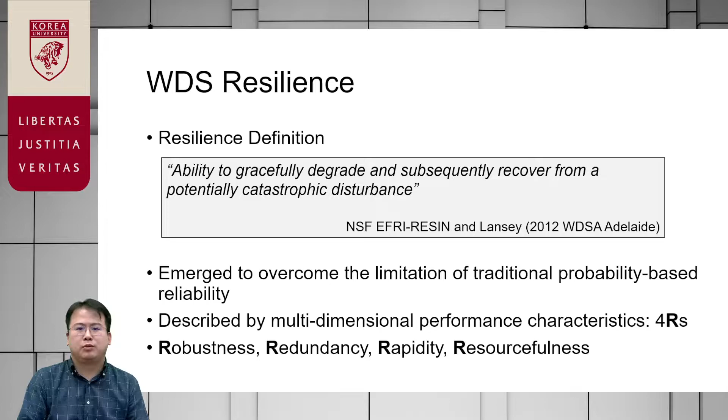Two different research branches introduced today are: first, data-driven pipe burst detection, and second, water distribution system design using resilience and robustness measures.

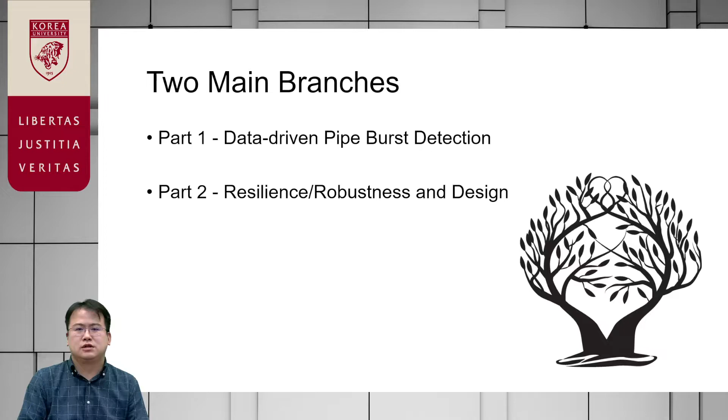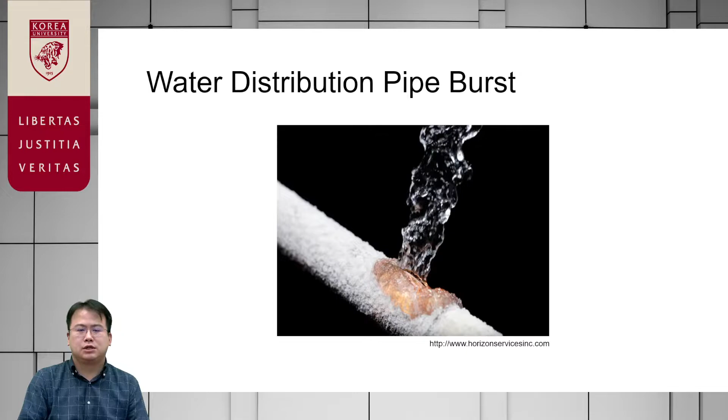Part 1: data-driven water distribution pipe burst detection. A pipe burst is a rupture of a pipe from pipe deterioration, high pressure, and ground shift from temperature changes and earthquakes. Pipe bursts cause water loss out of the system.

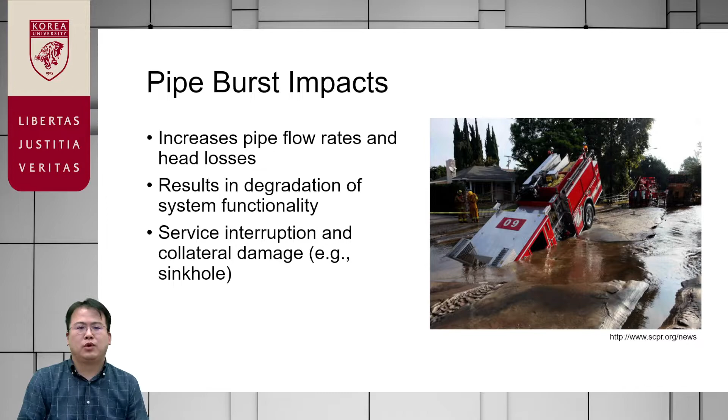Since most pipe bursts cannot be recognized above ground, customers and water users keep using their demand, which results in increases in pipe flow rate and head losses. With increased head losses, we have low pressure at the customer tap and degradation of system functionality. This service interruption should be rapidly detected to avoid any collateral damage such as sinkholes.

Data-driven detection methods identify pipe bursts by monitoring pipe flow and pressure measurements collected from measuring devices installed throughout the system, and this is the most widely used method for pipe burst detection. An example of another method is the water balance method, which compares the sum of inflow and total water usage or withdrawal of a district, requiring at least a month's time scale.

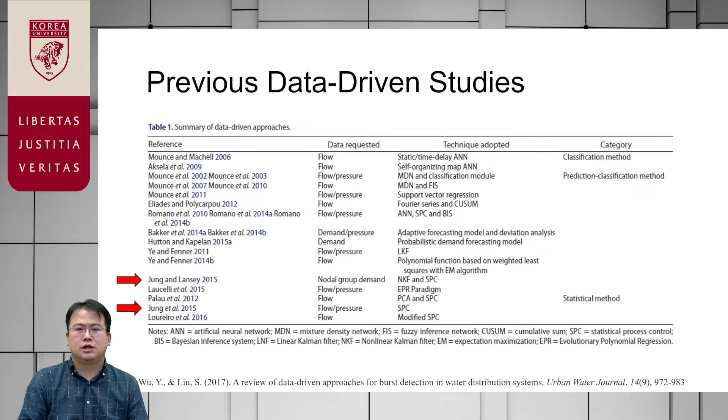In 2017, Professor Liu summarized data-driven approaches published in a quality journal, showing diverse approaches - for example, artificial neural network, statistical process control method, and Kalman filter-based method. In this talk, I'm going to introduce a total of three sequential studies that I conducted so far, including these two studies.

In the first study, I compared a total of 7 SPC methods with respect to their detection effectiveness and efficiency. SPC methods utilize statistical theory to identify any non-random patterns in quality characteristics, here pipe flow and pressure, by comparing measurements and historical mean and variance later obtained under normal condition.

We compared them using real-life data collected from a system in the Netherlands and also synthetically generated data from the Austin network. The results show that univariate methods with a long memory of past data, for example the cumulative sum method, perform better than multivariate methods. Univariate methods apply statistical rules to individual measured data independently, while multivariate methods use correlation information among different measured data.

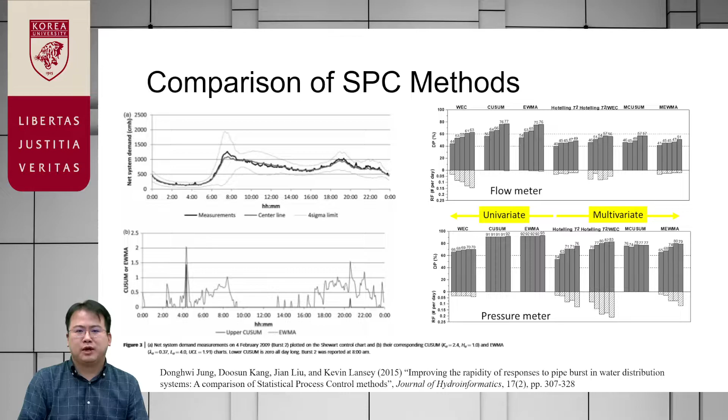The basis of the SPC method is the control chart, which consists of a time-varying mean as the center line and control limits constructed by mean plus or minus some multiples of sigma. For example, as you can see from the top figure, under 4-sigma control rules, if any measurement falls beyond the limit, it's assumed there's a burst.

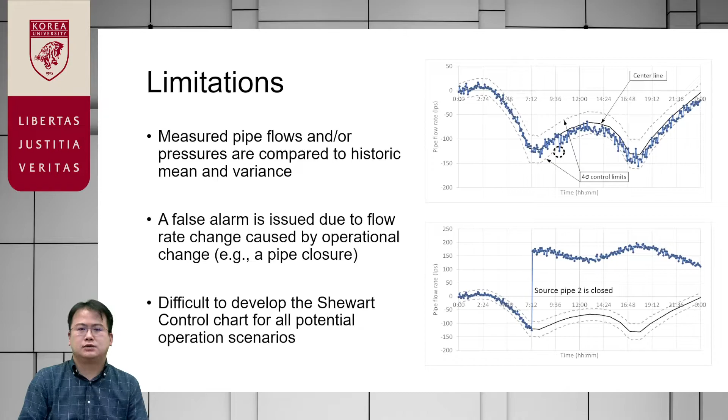To overcome the limitation, we propose a Kalman filter-based pipe burst detection method. Kalman filter is a state estimator from which nodal group demand can be predicted or estimated by using directly measurable variables in water distribution system, such as pipe flow and pressure. In estimating nodal group demand, Kalman filter can consider any operational and boundary condition change in exogenous variable, so there's a mechanism to consider that in the method.

Estimated nodal group demands are then disaggregated into nodal demands, by which a network hydraulic simulation is performed to obtain nodal pressure and pipe flow rate. These are estimated values and compare with the real measurements. The gap and residual between estimates and measurement is monitored to detect pipe burst in Kalman filter-based detection method.

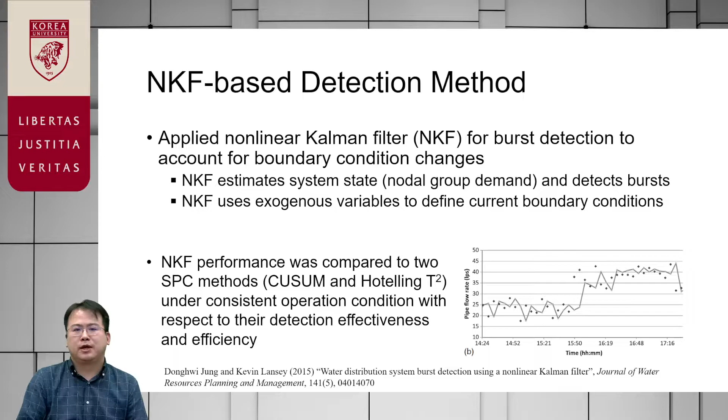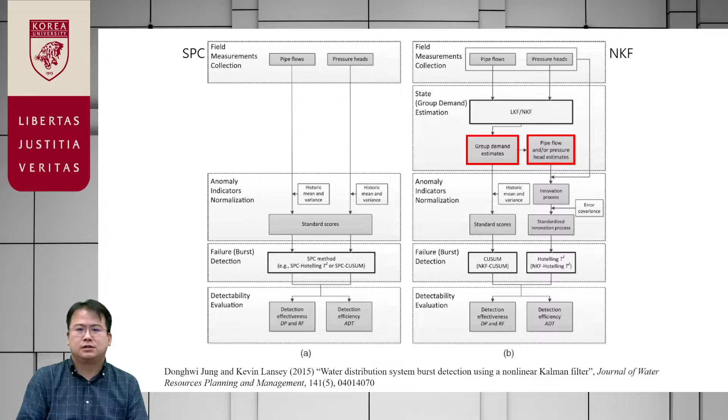We confirm that Kalman filter-based method has similarly high detection effectiveness and efficiency under source pipe closure condition compared to the best SPC method, cumulative sum method.

Finally, the third study is driven by this research question. In order to increase the level of information for burst detection, we can simultaneously apply multiple different detection methods. Since different detection methods have different pros and cons, such group application provide a room for compensation. However, we are asked to determine the final compromise decision if different detection results are obtained from individual methods.

We can use OR operator for the compromise decision in which we see there is a burst if at least one method issues an alarm. Or we can finally determine a burst only if all the methods issue an alarm. But we need to be smarter than that.

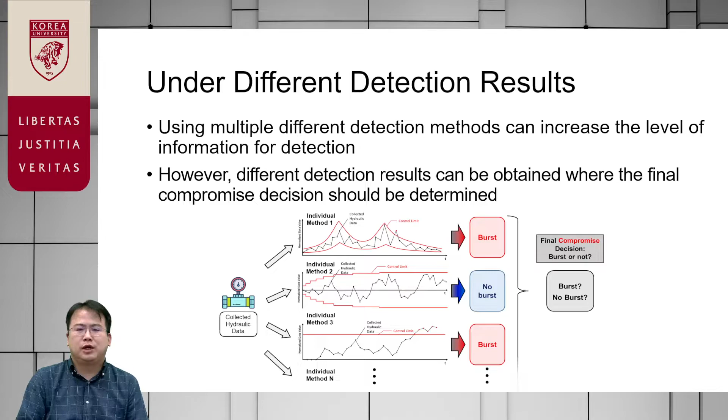So we propose a CNN-based ensemble detection model to extract the final compromise decision. In the model, alarm and no-alarm decisions of individual detection methods are represented by the binary number 1 and 0, which plug into elements of a grid image. Each different cell of the image has either a different method's value or the value of the same method with different parameter.

Therefore, this image incorporates diverse detection information and patterns and is used to train the CNN model that has final compromise decision as the output. We confirm in our results that comparing the proposed CNN ensemble model to traditional individual SPC methods, the ensemble model outperformed the best SPC method, cumulative sum method.

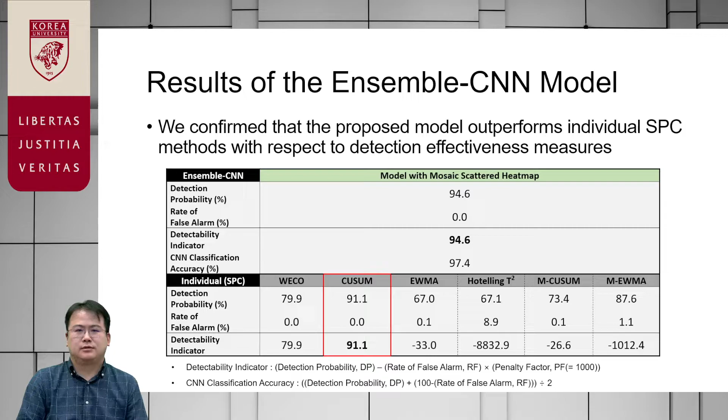Up to now, we saw good examples that effective and rapid pipe burst detection improve the rapidity of water distribution system because we can shorten the time to recovery. Generally, using effective anomaly event alarming software or prompt dispatch of pipe recovery reaction team increases pipe system rapidity.

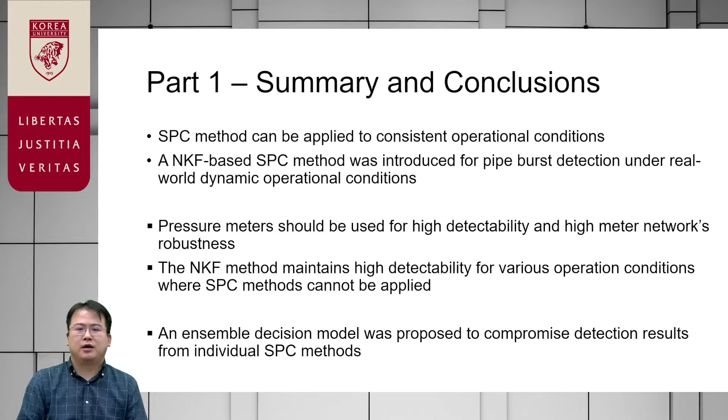Part 2 is water distribution system resilience and robustness and design using them.

In order to overcome the limitation of least cost design that only optimizes total system cost, reliability measure has been considered as some safety factor and the second design objective. Reliability is defined as service success probability, which for water distribution system design can be quantified by probability that stochastic pressure satisfies the minimum pressure requirements.

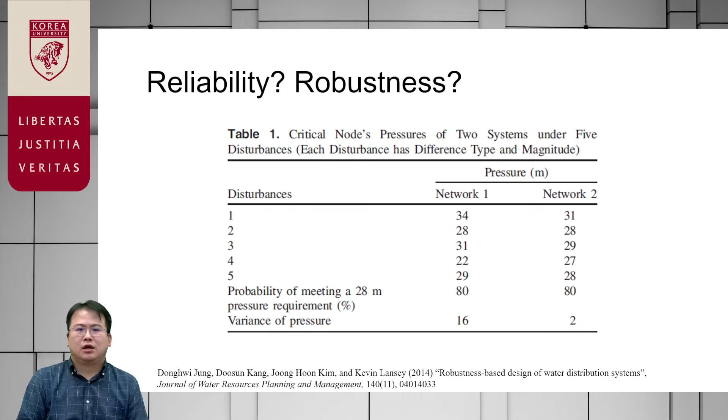Here we have two different networks under the identical set of disturbances. Given a 28 meter pressure requirement, both networks have a reliability of 80% because the minimum pressure is satisfied 4 out of 5 times, except disturbance number 4. However, if you look at the pressure behavior in more detail, network 2 has more consistent pressures with low variance of pressure. Therefore, network 2 would be preferred under the same level of reliability.

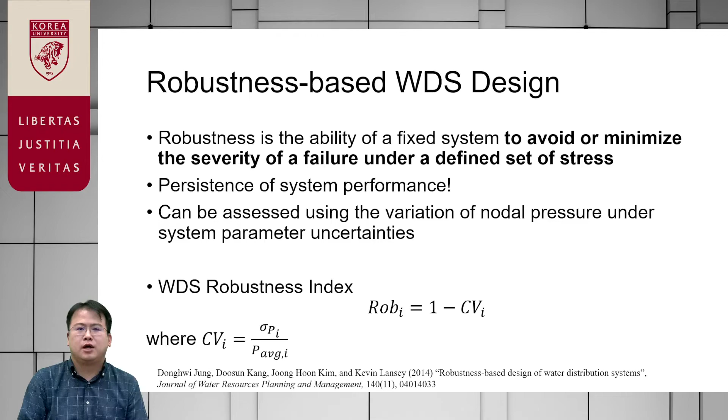To capture such system performance characteristic, we newly define and propose a robustness index for water distribution system design. Robustness is defined as the ability to avoid or minimize the severity of a failure under disturbances, and it is relevant to persistence of system performance. So the proposed nodal robustness index is computed by 1 minus the coefficient of variation of stochastic pressure. Given many reliability indicators and newly developed robustness indicator, we raised this research question.

The first question is how closely these reliability, robustness, and performance measures are related. The second question is which physical characteristic of the system most affects the performance measure.

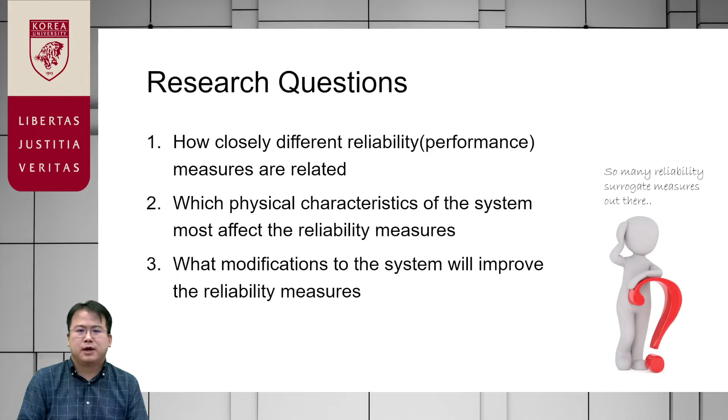To answer the question, we performed two different correlation analyses, Pearson and Spearman rank correlation, for 8 surrogate measures of water distribution system reliability, robustness, and performance. Those are capacity hydraulic reliability, which you saw earlier in this part, robustness measure, a reliability measure quantified based on single pipe failure, and finally seismic reliability characterized by multiple component failure conditions.

Two different versions of each measure are considered, making a total of 8 measures. In addition, their correlation with 6 system physical characteristics was analyzed too.

Average node degree and meshedness coefficient are the system density and connection indicators. Others are total system demand divided by number of sources, average pipe diameter, and total service area.

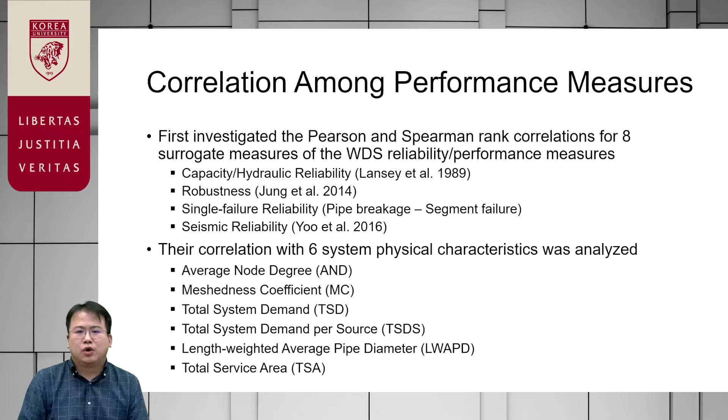A total of 16 different water distribution networks were used for this correlation analysis. The networks considered have diverse characteristics with different layout, density, number of components, etc. This is to derive a generalized conclusion from the analysis.

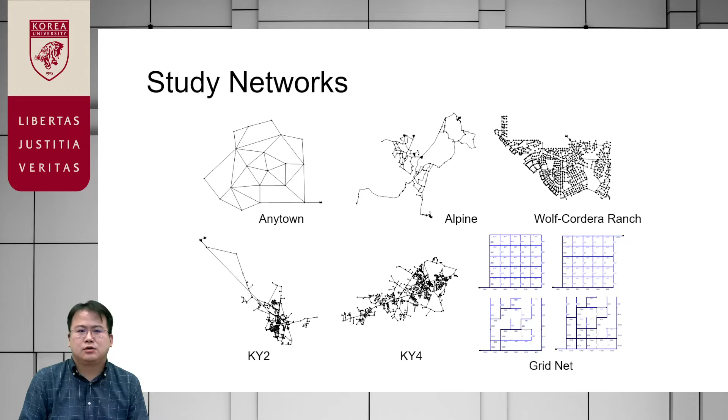I'm going to briefly show you one key result of this study. This is the correlation coefficient matrix for Pearson correlation analysis. The two correlation analyses turn out to have a similar pattern of results.

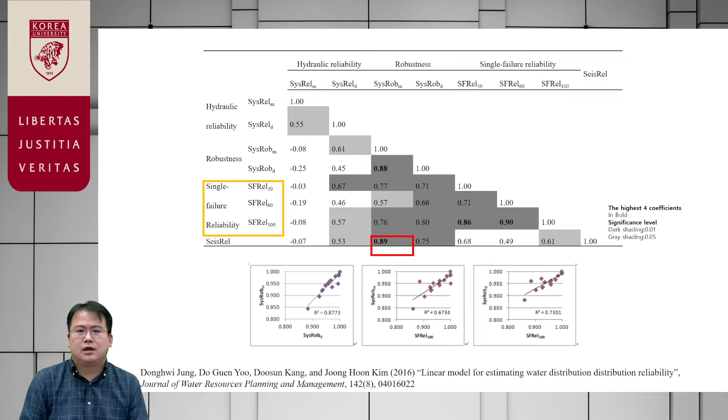We confirmed that seismic reliability has high association with the robustness indicator. Considering the fact that we have not considered any mechanical failure in computing the robustness measure, the proposed robustness measure is good at capturing system persistent performance as intended under catastrophic failure conditions.

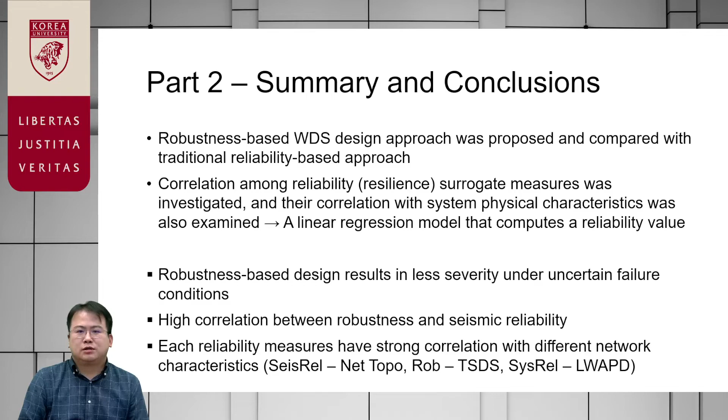This is the summary and conclusion of part 2, but I'm going to skip this. Finally, let's talk about forensic engineering and some future study directions.

This conference is organized by the Hyperconverged Forensic Research Center for Infrastructure at Korea University. By ASCE definition, forensic engineering is the application of engineering knowledge to the investigation of failure, collapse, and other performance issues of civil infrastructure.

While resilience engineering focuses more on system preparation, reaction, and recovery towards and from failure, and on solution approaches to improve it, forensic engineering focuses more on the investigation of the cause and processes of failure.

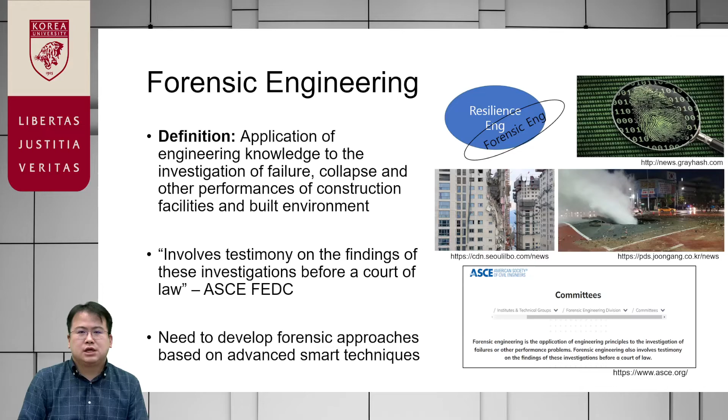In our research center, we deal with forensic engineering in 3 different domains of civil engineering: geomechanics, structures, and water and environment. Let me briefly introduce our research center here before talking about potential future study.

The PI of this project is Professor Jong-Sub Lee, and it is supported by the National Research Foundation of Korea for a total of about 7 years.

11 professors from KU, SNU, Yonsei University, and Gyeongbuk National University are working together on this interdisciplinary research topic to develop forensic approaches for failures driven by complex disasters.

These are used in 3 domains, with approaches based on 4th industrial revolution techniques such as deep learning models, CPS modeling, and water quality monitoring using ROV, etc. These techniques are interconnected for each stage of forensic investigation: forecast, detection, simulation, and protection.

Especially, group number 3 is the water and environmental group, and today's session is for this group. We develop forensic investigation approaches for failures that can occur at various points in the urban water cycle.

These techniques range from distributed water management and water cycle analysis, to remote water quality monitoring, up to pinpointing and diagnosis methods for pipe leakage and anomaly water quality events in distribution networks.

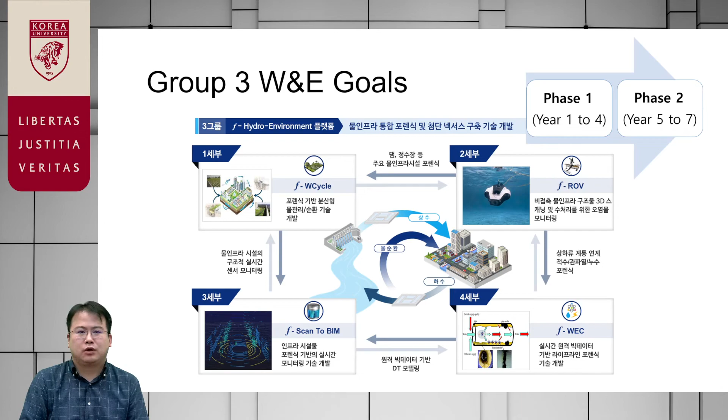This is the final page of my talk and the most critical potential future study. The most critical potential future study is related to the fact that smart meters are being installed more and more in our boundary.

Smart meter data is characterized by pulse data because it is installed at the inlet pipe of each customer. Therefore, it has many zero values for most of the time.

Another special feature is that it has high temporal and spatial resolution. Some smart meters measure pipe flow rate every second or every minute. This is a lot of information and allows a lot of room to improve burst detection effectiveness and efficiency compared to conventional meters, which are generally installed at main lines and few locations.

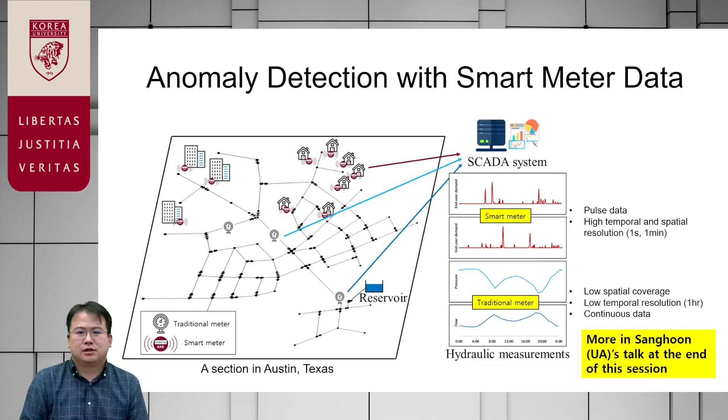More on this will be delivered in Sang-hoon's talk at the end of this session. This is the end of my talk. Thank you for listening. Thank you.